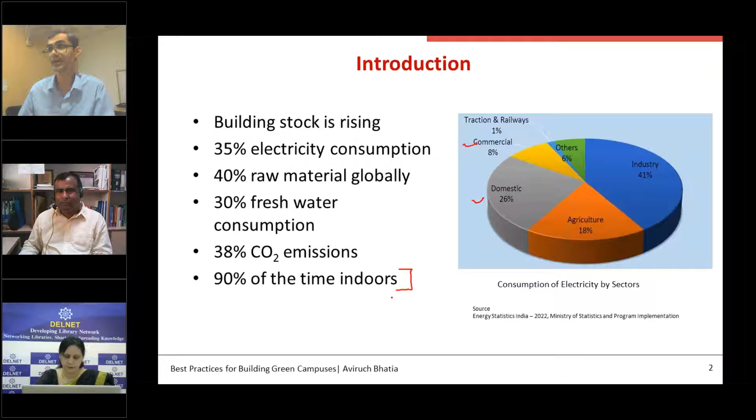Buildings also consume 40% of raw material globally. There is fresh water consumption, CO2 emissions, and 90% of the time we spend indoors, so that should be comfortable also.

To reduce this resource consumption, India is committed at COP26 2021, and as per India's commitment, 50% of our energy needs will be through renewable sources by 2030. We also need to achieve net zero carbon emissions by 2070.

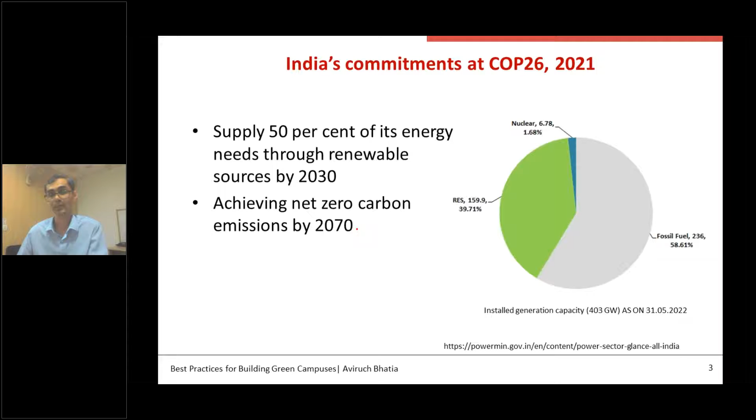To achieve this, we need to construct green buildings and adopt green building features. How do we define a green building? A green building is a building that in its design, construction, or operation reduces or eliminates negative impacts and can create positive impacts on our climate and natural environment. It preserves precious natural resources and improves life quality. So green building is not only for saving energy, water, or material, but also to bring healthy living conditions inside our building.

Campus buildings are also important because students study in this campus. So these green buildings, if we are making them, have both tangible and intangible benefits. Tangible benefits are water use reduction and energy use reduction, but intangible benefits include health and well-being of students, faculty, and other staff.

It includes enhanced air quality, excellent daylight, and other conditions. Generally, a green building has 5 major areas that include energy, indoor air quality, materials, site, and water, and it will give us healthy, comfortable, durable, energy efficient, environmentally responsible conditions.

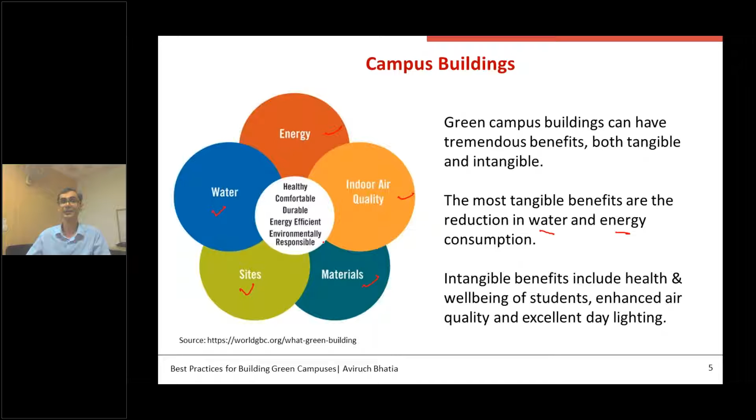So let us start with energy efficiency. These energy efficiency features in building we can achieve with passive design, because nowadays, as outdoor temperature is rising, we are using a lot of air conditioning systems, that is HVAC - heating, ventilation, and air conditioning. Passive and low energy design systems can minimize the hours where we actively use air conditioning systems.

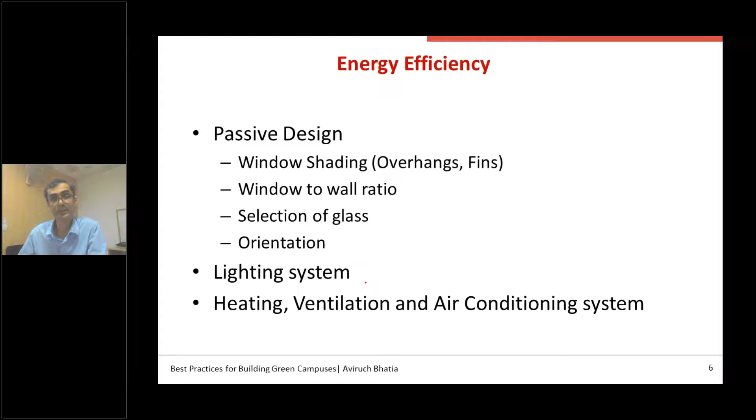Passive design features that we can adopt are window shading, including overhang, fins, blinds, window to wall ratio, selection of glass, and orientation. There are other methods like earth air tunnel, stack effect, chimney that can be adopted, and lighting system related measures can be adopted in buildings, and various HVAC system related measures are also there.

Let us start with windows in passive features. Generally we use single glass window in our building, but if we replace that single glazed glass with efficient high performance single glazed glass, or make it double or triple glazed glass - in double glazed glass we can fill either air or inert gases.

The replacement of glass with a high performance glass can lead to a lot of savings, because the glass has three main properties that we call visible light transmittance, solar heat gain coefficient, and thermal transmittance of that glass.

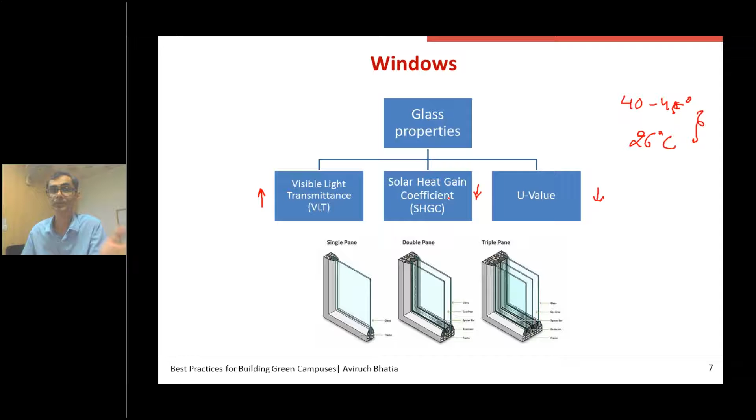India is in tropical climate, and we always want to restrict heat transfer, because in India we have outdoor temperature at 40 to 45 degrees Celsius, and inside we maintain, let's say, 26 degrees Celsius. So there is a delta T, and whenever there is a delta T, there is heat transfer, and we don't want heat to come in because it will lead to hot, warm conditions inside and increased use of air conditioning system. So we need to restrict U value to be lower, and solar heat gain coefficient - the direct sun radiation we are getting - we want it to be lower, and visible light transmittance we want as high as possible, because the main purpose of windows is to bring useful daylight for us. So in Indian conditions, U value and SHGC should be lower, and visible light transmittance of window should be higher.

Here is the total spectrum of solar radiation that we receive. We are interested in this visible portion - there is ultraviolet, visible, and infrared. This visible portion of the spectrum is useful for us because it can be used for daily visual activities, but infrared and ultraviolet cause heat, and our aim should be to reduce these portions. So a high performance glass is available to minimize the infrared part and maximize the visible part.

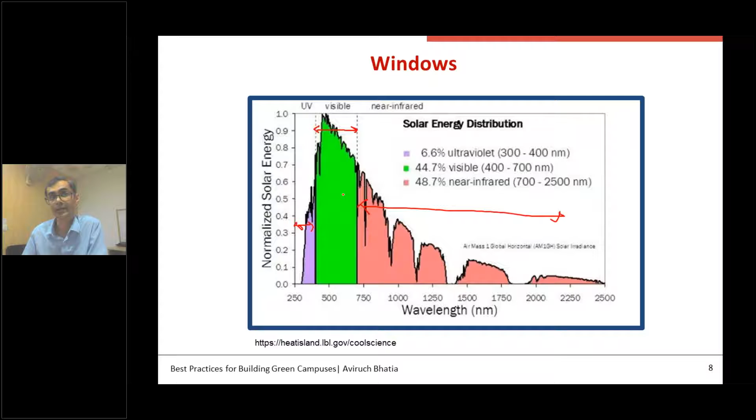Window to wall ratio is also important. In the Western world, where climate is cold, they use large windows in their buildings, but copying that same architecture or window to wall ratio in India is not recommended, because we have a different warm climate and we want to reduce heat gains. In the Western world, in cold climate, they want to increase heat gains because there is heating energy consumption, but here we have cooling energy consumption, so we want to reduce it. So window to wall ratio is, let's say, this is your wall - total wall area - and this is window we have, so this is window area to wall area.

In Indian conditions, even the energy conservation building code has a cap of about 40% window to wall ratio. So we can use different simulation tools to find out what is the optimum percentage of windows we can provide in our building. You can see this chart.

How does this chart vary? If there are no windows in our building, it will be completely dark and we'll use interior lights. But if we have windows, we get some daylight inside, and our use of interior lights is limited, so energy consumption comes down. But after a certain percentage, all our interior lights are switched off, and if we keep increasing window to wall ratio, energy consumption rises again, because the heat gains from windows increase the energy consumption of the air conditioning system.

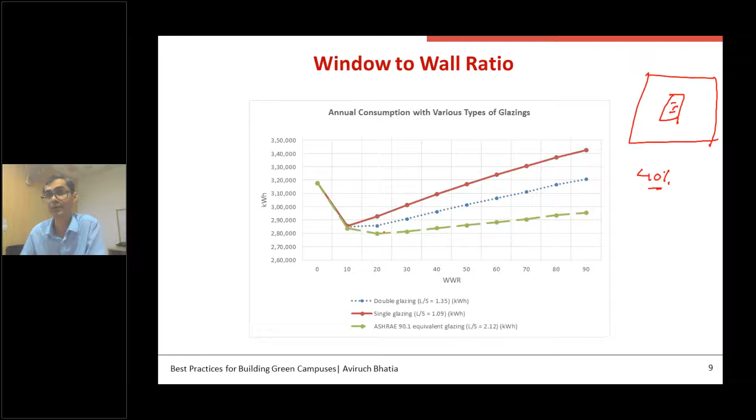With different types of glass, if you use single glaze glass, the inversion point is lower. If you use better glass, like double glaze glass, or ASHRAE 90.1 equivalent glass, we can get this inversion at a higher point. So instead of having fully glazed walls, if we limit our window area, or optimize it, it will really help bring in more daylight and save energy.

We can also reduce energy consumption for the lighting system by having efficient lighting fixtures, efficient LED lights, daylight controls, and occupancy controls.

Daylight controls help us whenever daylight is available. It will automatically switch off interior lights, or it can dim and adjust them. That will lead to savings in energy consumption.

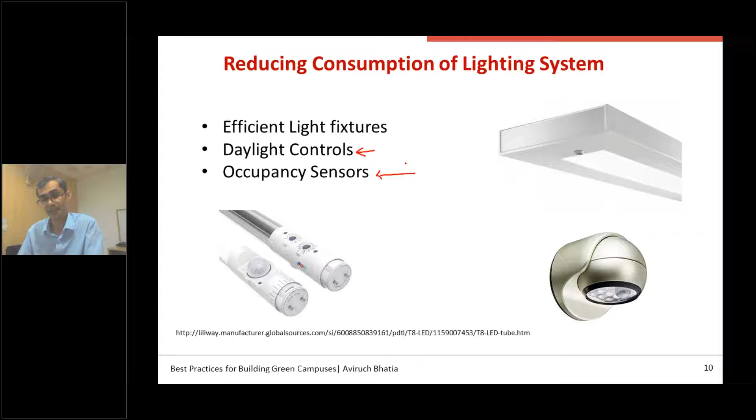Occupancy sensors let us switch off some portion of the interior lights when there are no occupants. This is how we can save energy. Green features like installing daylight controls, occupancy sensors, and reducing lighting power density can help us save a lot of energy.

Here is an article published by researchers who demonstrated this in a university building. If we install a motion detection system and room management system, about 30% of energy can be saved.

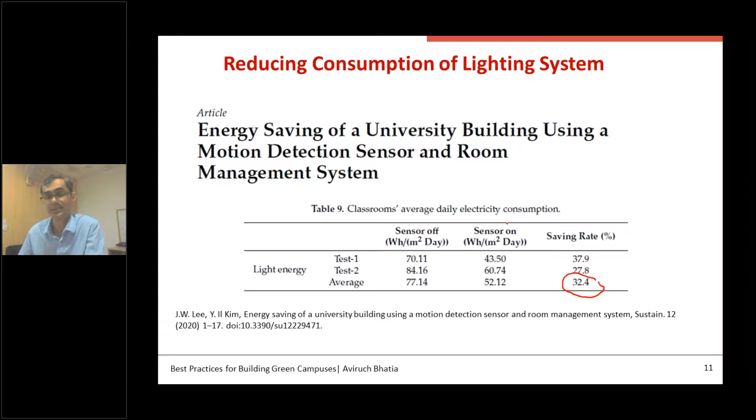Classroom daily electricity consumption. Now we'll come to equipment and appliances. The best practice is switching off, or enabling power-down mode, which reduces energy consumption and heat produced by equipment, which in turn lowers the cooling costs. Whenever equipment is not being used, we can switch it off.

Upgrading existing equipment: some energy efficient appliances may cost more to buy, but it will recoup savings over the lifetime of the equipment. Like we now have the BEE star rating system, so if we use star-rated fridges, fans, and equipment, the initial cost might be slightly higher, but over the long run in operating conditions we can save energy.

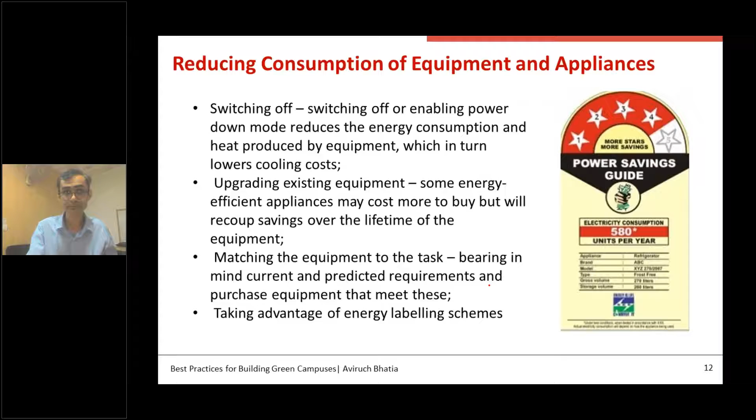Matching the equipment to the task, bearing in mind current and predicted requirements, and taking advantage of labeling schemes that are available. Whenever appliances are not used, it is better to switch them off. For example, with computers, generally we won't shut them down, we just hibernate them and keep them like that.

If a computer is left on overnight for a year, it creates enough CO2 to fill a double-decker bus. This is ghost power, because we are not switching it off. Even in hibernation mode, a computer system consumes some power.

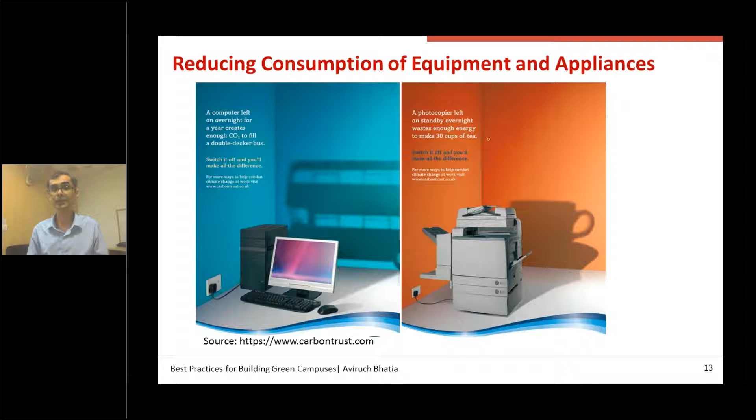We also use photocopier machines in our campuses. A photocopier left on standby overnight wastes enough energy to make 30 cups of tea. So it's recommended that whenever appliances are not in use, it's better to switch them off instead of keeping them on standby.

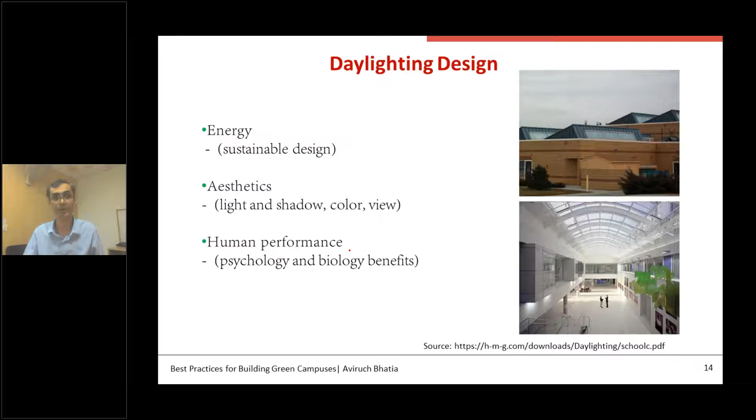Daylight design is also a green feature, because for visual tasks we need daylight, and daylight can help save energy - if we get sufficient daylight in our building, we can switch off our interior lights and save energy not only on lighting but also on the air conditioning system. It can help increase aesthetics, and also increase human performance with psychological and biological benefits. This is one such study done in the USA.

This study was done for the daylight classroom and without daylight classroom. 21,000 students' test scores were analyzed. It was found that if we have good daylight in our classroom, students perform better, 20% faster in a math test and 26% faster in a reading test. So there are a lot of benefits.

If we work in a without-window environment, versus an environment where we have sufficient daylight, our performance is generally increased because daylight gives psychological and biological benefits. And also the views are important. If we are able to see the outdoor conditions, if we are connected to outdoor, this will give additional benefit.

Thermal comfort is also one of the features in green buildings, and thermal comfort generally depends on 6 parameters: air temperature, mean radiant temperature, relative humidity, air movement, clothing ensemble, and metabolic rate and activity.

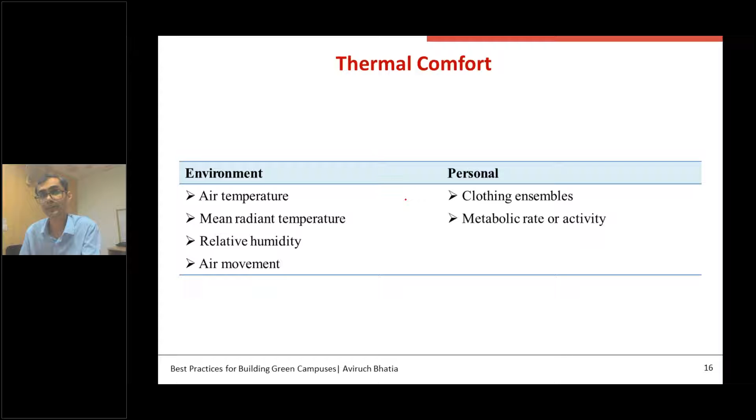Why is thermal comfort important in green buildings? Because if we are thermally comfortable, our productivity for work increases, and also it is related to energy, because of the set point we generally maintain for the air conditioning system. Generally we maintain about 23-24 degrees Celsius in air conditioned spaces, and if we increase the set point by just 1 degree Celsius, we can save about 4 to 5% cooling energy.

So how do we decide what set point we should maintain? Instead of 24 degrees Celsius, if we set our set point to 26 or 27 degrees Celsius, whether it is giving comfortable conditions to us or not - the 6 parameters that we discussed about thermal comfort play a role.

We can set temperature higher with the use of a ceiling fan, because air movement is also one of the parameters. So instead of switching off the fan, run the fan at a lower speed and increase the set point. It will give us the same comfort conditions.

These comfort conditions are also dependent on mean monthly outdoor temperature. In New Delhi, the mean monthly outdoor temperature is about 33-34 degrees Celsius, so our comfort conditions are at the highest set points, compared to someone living in Stockholm, where mean monthly outdoor conditions are at 16 degrees Celsius. So we can feel comfortable at about 31 degrees Celsius also.

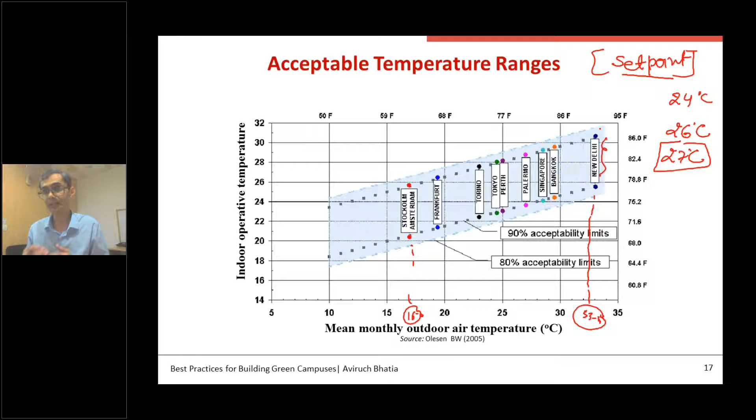It is not like we need to set our set point at 22 degrees Celsius and cool that room too much. We can increase the set point while slightly increasing air movement by switching on a fan. By doing this, we can save a lot of energy.

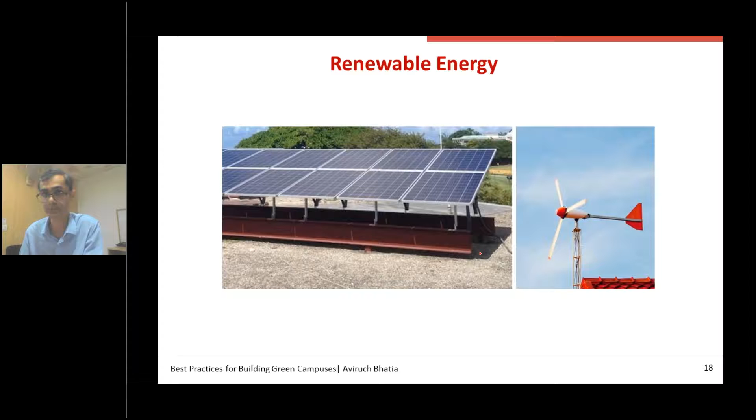Whatever measures we can put in our buildings - first is to bring measures by which you can decrease energy consumption, and for the rest of the energy that you are not able to save, we can install renewable energy generation systems like photovoltaic or small wind turbines to generate green energy, because the energy we get from the grid is mostly from thermal power plants where coal is consumed, causing CO2 and GHG emissions. If we install photovoltaic and wind energy systems, these are clean sources of energy, and we can generate it on site, or invest in it off site.

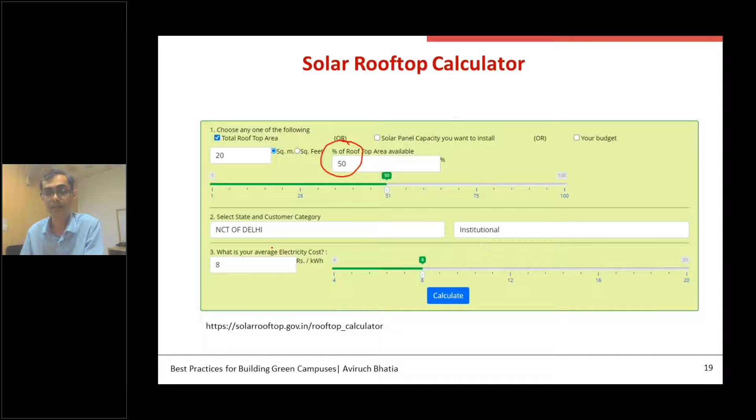Here is a calculator from the government available to size the system - how much roof area is available for installing, and we can set here if it's an institute, if it's in Delhi, what is the electricity cost, how much roof area is available. In this example I've kept 20 square meters of area available, it's an institute type of building, and this is the electricity rate we are paying.

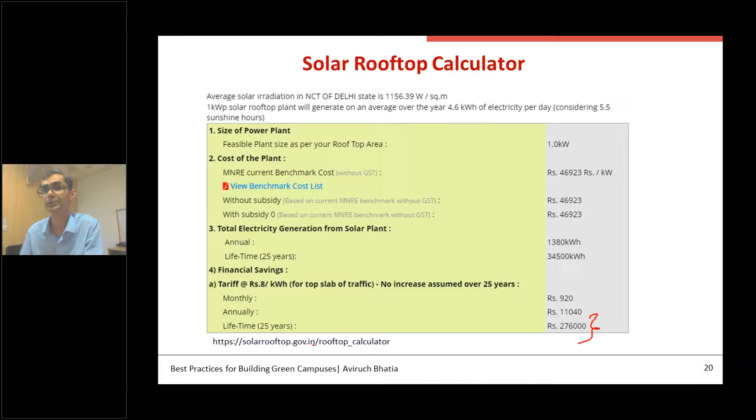By filling this information, it will also suggest how much photovoltaic power plant you can install, what will be the cost per kilowatt, what will be the energy generation, and what your lifetime cost savings will be. So you can visit solarrooftop.gov.in to find out how much PV you can install on your rooftop.

This is one more green feature we can adopt: the cool and green roof. It requires minimum investment - just paint our roofs with white color paint, or a green roof can also be installed. So what is the benefit of installing a cool roof?

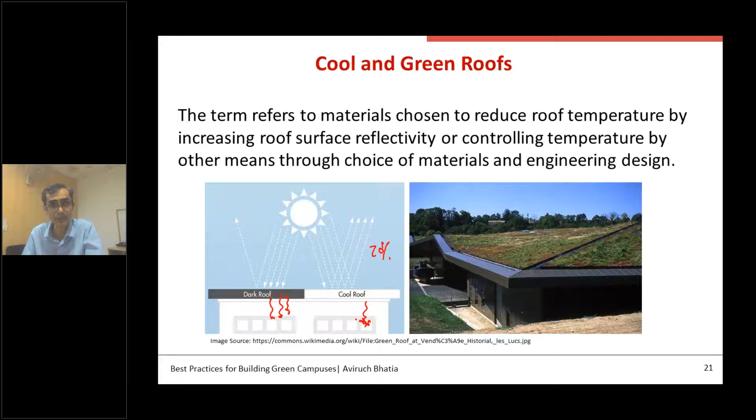So this roof is absorbing only 30% of heat, and only few heat gains are in the building. So you can reduce your air conditioning energy and bring thermal comfort conditions inside if it is a comfortable passive condition. So cool roof and green roof are beneficial, not only in getting green points but also in saving energy.

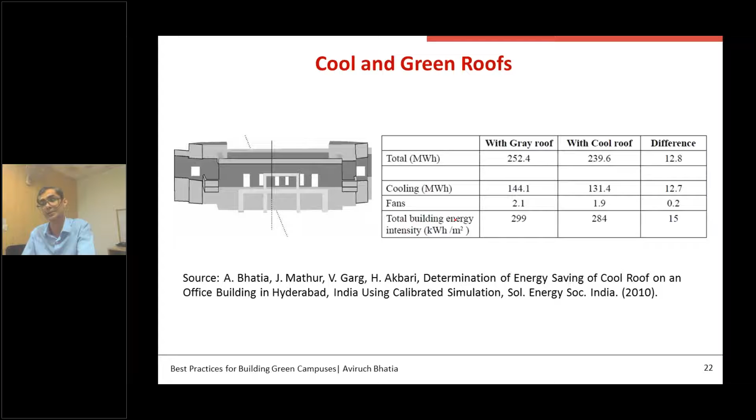And at the urban level, the urban heat island is a problem. Urban heat island is when the regular temperature is there, but at the city centers there is a higher temperature than the surroundings, and that we call the urban heat island.

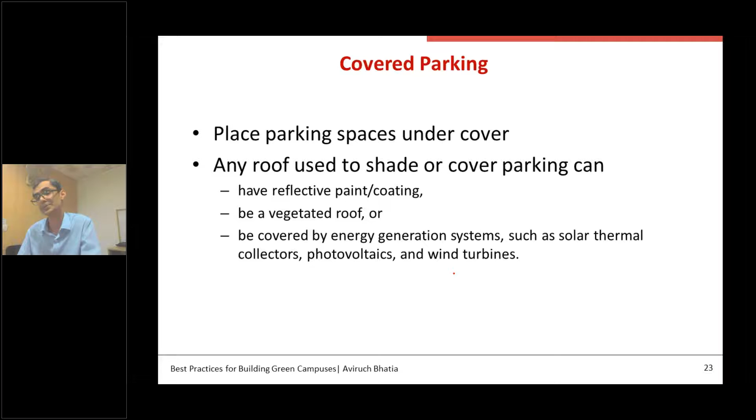To reduce urban heat island, one way is because parking spaces are black or tar road, and vehicles parked outside absorb a lot of energy and heat. So if we can move parking to covered spaces, and these covers can have reflective paint, vegetated roof, or energy generation systems, it can help reduce urban heat island effect.

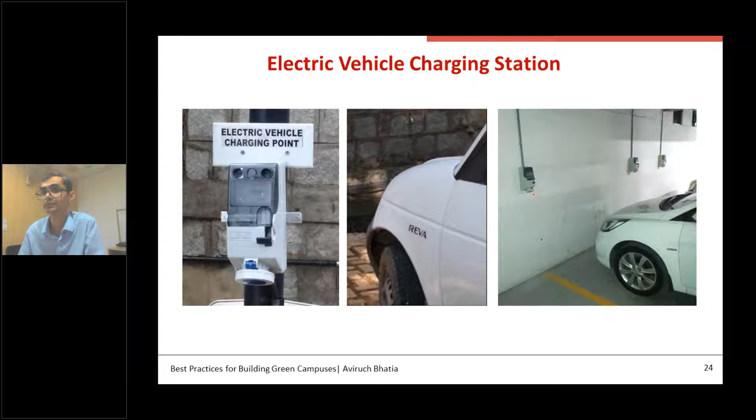Also regarding parking, if we can install electric vehicle charging stations - nowadays electric vehicles are there, so you can see electric charging point stations if the car is there. If we give preference to those bringing electric vehicles by providing charging stations so they can charge their vehicles, it can help.

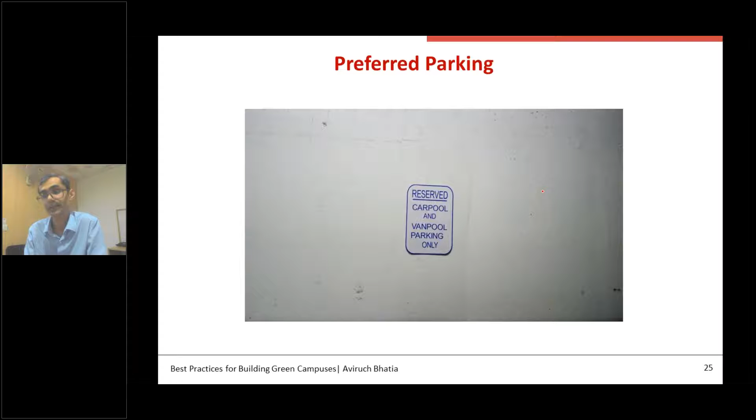And also keeping reserved parking for carpool, because if we are doing carpooling and van pooling, that can add value, because we are reducing the number of vehicles on road, which leads to reduced CO2 emissions and pollution. So giving reserved or preference parking for those coming by carpool or van pool can add to the green feature.

Night pollution reduction is also a site related parameter. We have different nocturnal birds, and if there is light pollution at night, it is harmful for them. So consider the location and surrounding areas during lighting design, select luminaires, location, and orientation that minimize light trespass into adjacent properties.

Aim the light angle low so the entire beam falls within the intended area and is downward. Use well shielded luminaires, couple outdoor lighting with lighting controls and motion sensors, and design interior lights such that they won't go out of the building. That can help reduce night pollution.

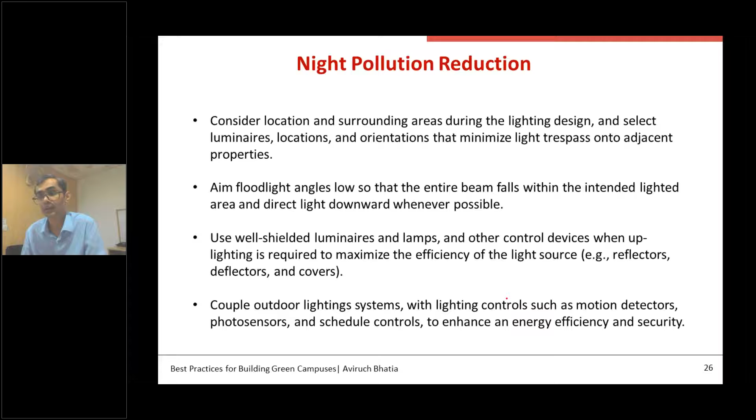Now we come to water related efficiency, because if our buildings are green, we can save a lot on water, including potable fresh water. By use of water efficient plumbing fixtures, ultra low flow toilets, urinals, waterless urinals, energy efficient low flow sinks, and water efficient dishwashers can help. Also water recycling or reuse.

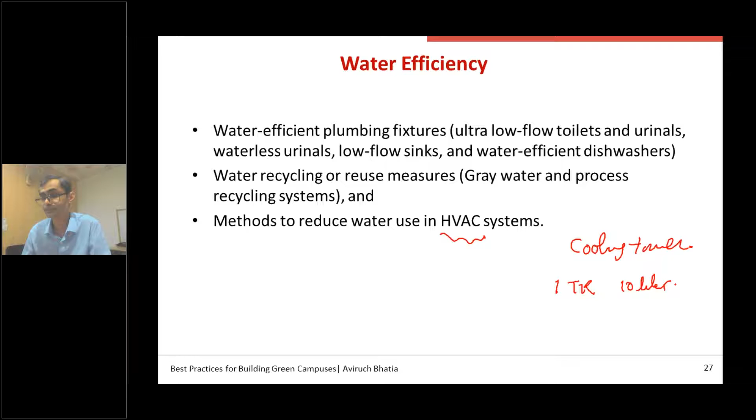Methods to reduce water use in air conditioning systems. In air conditioning we use a lot of water, because in central air conditioning systems we use a cooling tower, and this cooling tower, per ton of cooling per hour, consumes about 10 liters of water. So a huge quantity of water is required.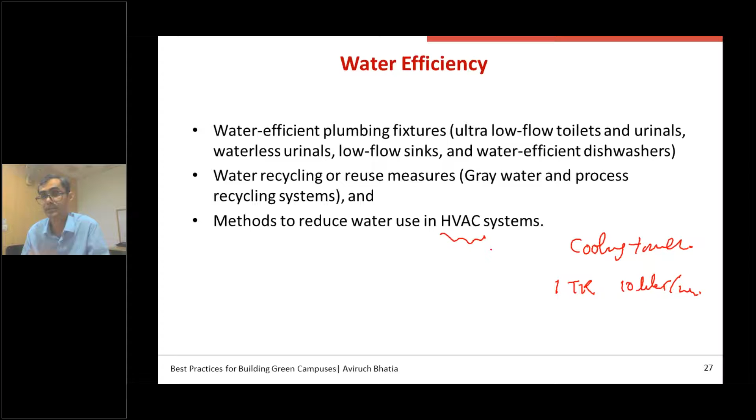So if we are using gray or recycled treated water for the air conditioning system, that can help reduce freshwater requirements.

In landscape features, irrigation and landscape measures include water efficient irrigation systems and irrigation control systems. You can see drip irrigation - if you can provide that, reduce the turf area since turf needs a lot of water, prefer native species, and use xeriscaping with species that take very little or zero water, that can help save water for landscape.

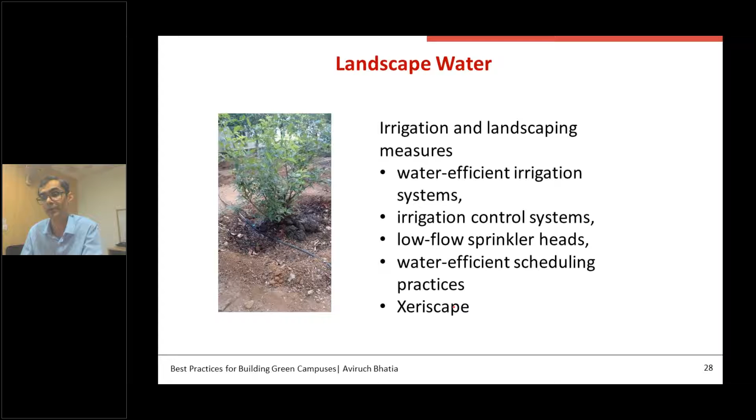And creating a water balance can also help to understand where water is going. This is the sample water balance for one of the projects I have done. You can see here this is supply water from the municipality, and this water goes mainly for domestic and flushing purposes.

Both water in this project we are collecting, and it is going to the sewage treatment plant, and we are getting this recycled water, which we again use for flushing. So in this project we have dual flushing lines - some portion, about 8.4 KLD, comes from fresh water, but the remaining recycled water we use for flush.

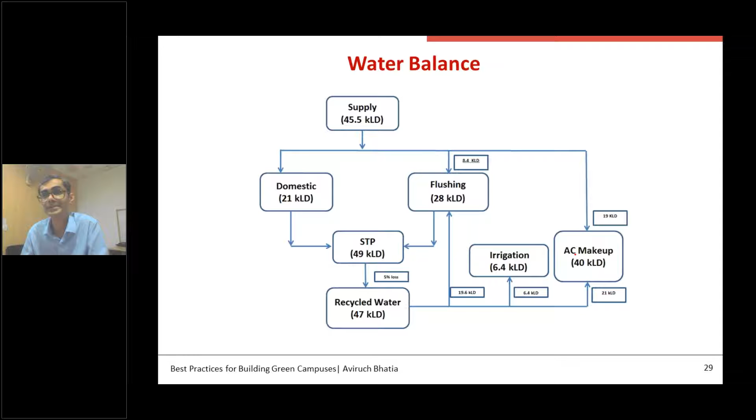And irrigation water, 6.4 KLD, and AC makeup water. So by creating this type of water balance, we can understand if there is any loss of water or how much water we are using for different purposes. And rainwater harvesting, both roof and non-roof, can be one of the measures.

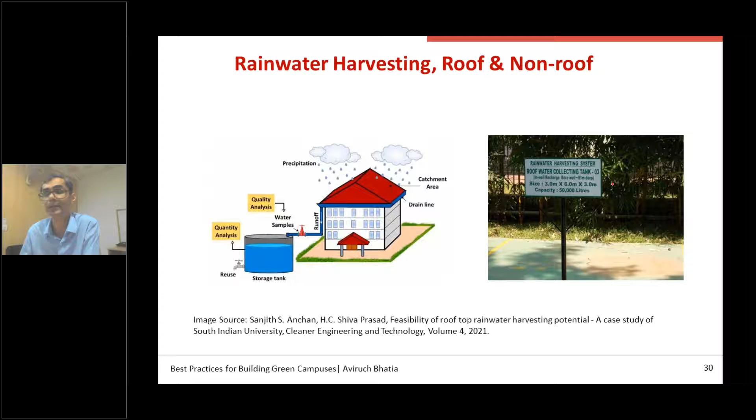On the roof area we can install pipelines to collect rainwater, filter it, and then store it in a storage tank, or use it for recharge of the aquifers. In one of the projects, the roof water collecting tank has a 50,000 liter capacity, and it is connected with the aquifer for groundwater recharge.

After water, there are some features related to materials. Segregation of waste is one of the green features. Whatever waste is generated in our building, if we are able to segregate it, like in campus we have paper - after taking printouts, if one side is available for use, we can use it for some other purpose, saving on paper.

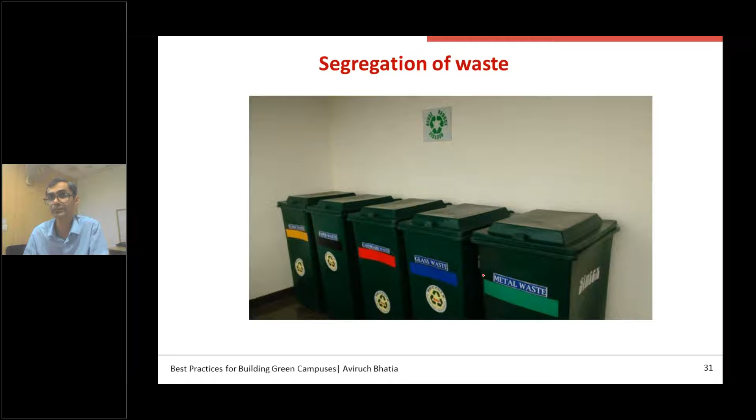We need whatever cardboards and other things, if we can recycle them - dry waste, wet waste, or metal waste - if we can separate them out and use them wherever possible, reduce and reuse, this can be done. In schools, because students are indoor, a dust-free environment is important, as that is related to indoor air quality or indoor environment quality.

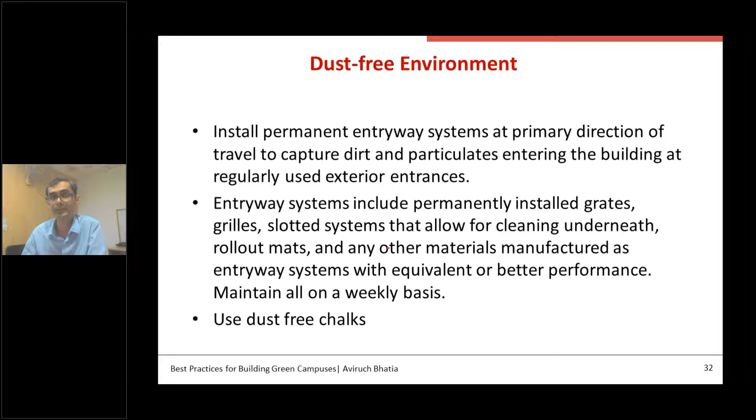We can install a permanent entryway system at the primary direction of travel to capture dirt and particulate entering the building at regularly used exterior entrances. Wherever there is an entry system, if we can install some kind of dirt capturing system like grates, grills or slotted systems, and regularly clean them.

We can also use dust-free chalks to increase air quality. One more green building feature is fresh air, because especially in schools and campuses, in classrooms occupancy density is quite high. If there is a 2-hour class with students continuously sitting, CO2 levels will rise, and a rise in CO2 level leads to drowsiness, eye irritation, and inability to concentrate - these are all adverse impacts of CO2 levels.

So what we need to do is have fresh air intake. We can supply fresh air through our air conditioning system, or we can also have operable windows, so we can allow some fresh air to come in to keep a check on CO2 levels. These type of CO2 sensors are available.

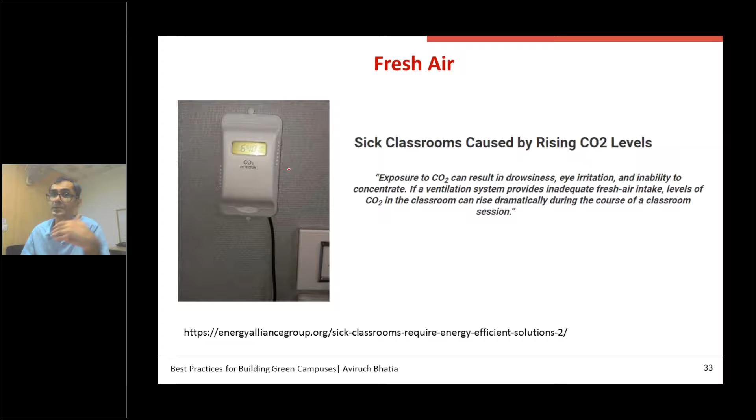If we can install these type of CO2 sensors in classrooms or highly occupied areas, meeting rooms, conference rooms, we can see if CO2 levels are going high, and then we need to open windows or start a fresh air, dedicated fresh air system.

And volatile organic compounds - VOCs are carbon containing substances that easily become vaporous or gases. They can be found in paint, coatings and cleaning products. In coatings, solvents containing VOC assist in quality of application and drying, so the paint substance does stick on the surface.

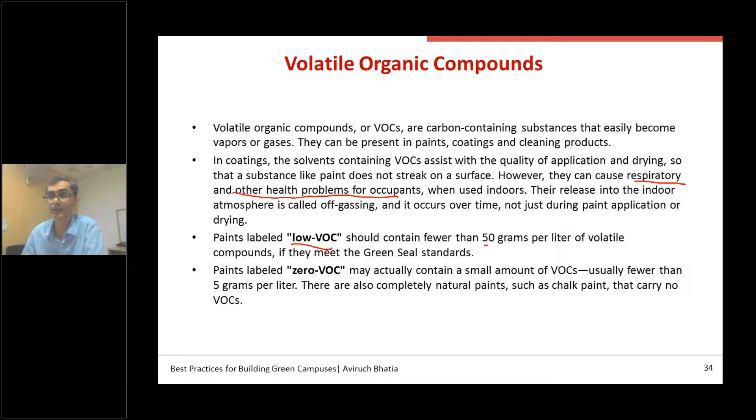These can cause respiratory and other health problems for occupants. When used indoors, they release into the indoor atmosphere through off-gassing, which occurs over time. So we can use paint that is low VOC - less than 50 grams per liter - or zero VOC natural paints.

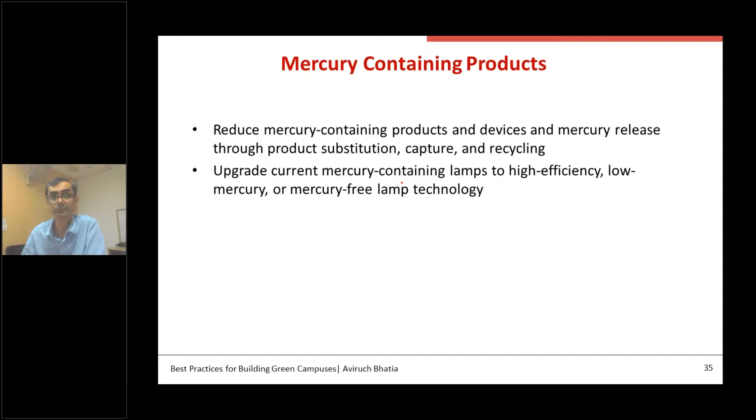We can also use products having lower mercury, reduced mercury content - basically mercury-free lamps we can use.

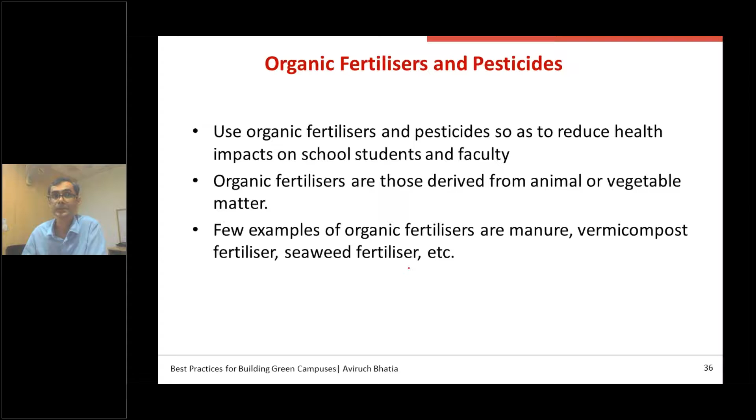We can use organic fertilizers and pesticides to reduce the health impact on school students and faculty. Organic fertilizers are those derived from animal or vegetable matter. A few examples of it can be manure, vermicompost, seaweed fertilizer, etc.

Green housekeeping - use environmentally friendly cleaning products to prevent chemical related health hazards. Housekeeping products include hand wash, soap, detergent, and toilet cleaning solutions.

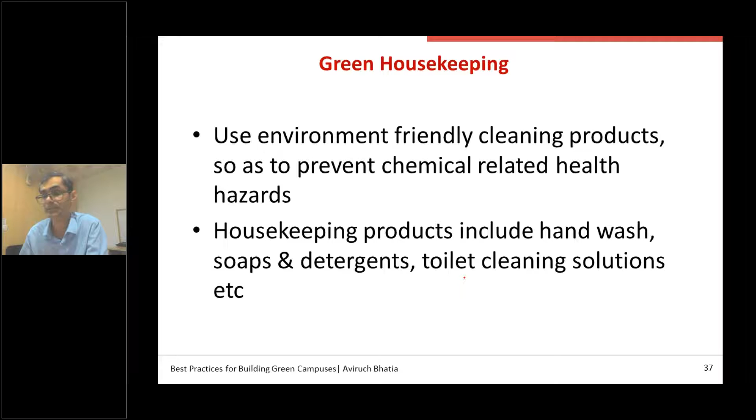Also, because of use of air conditioning systems and fire suppression systems, we generally use HCFC and HFC refrigerants - these are ozone depleting substances. So we need to minimize or use refrigerants such that they have minimum ozone depletion potential, ODP.

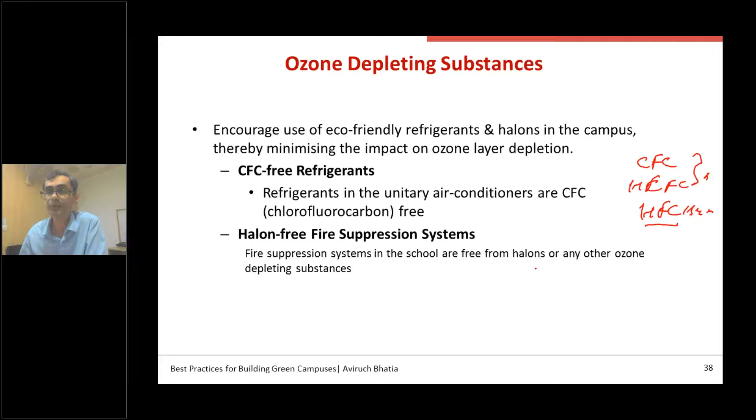So we have CFC, HCFC - these we need to omit. HFCs 134A, 410, and nowadays in future refrigerants are also available where we are minimizing these. Also, the fire suppression system should be free of halons or any ozone depleting substances.

Now we have discussed green features related to energy, site, water, indoor air quality, and materials. Now this is the case study I am going to take. This is the TERI School of Advanced Studies in our campus. What are the green features that we have installed?

Our campus is located in Vasant Kunj, New Delhi, and it is 2 acres of campus. Sustainability is the key concept guiding the entire design. We have this G+4 building with institutional area, commercial space, and student hostels.

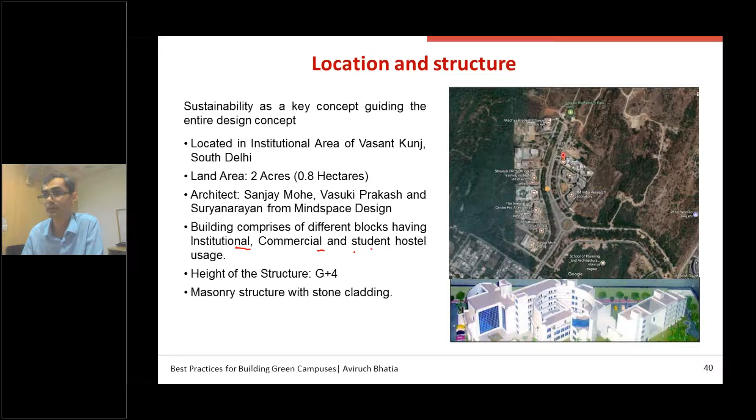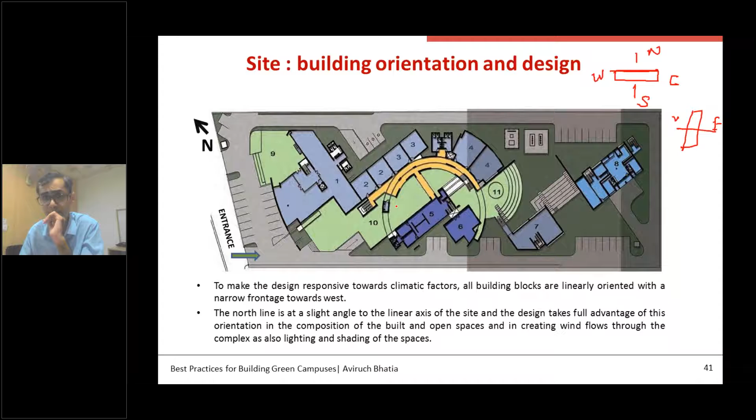Building orientation and design: the building is oriented in such a way to minimize direct solar exposure. If our building is oriented minimizing towards east and west, with more area towards north and south, this orientation is generally considered the best. If the building is oriented so more area faces east and west, we get more direct radiation. So this building was designed to get the benefit of sun angles to reduce direct exposure to sun, and wherever there is sun, for the daylight feature we need to provide windows.

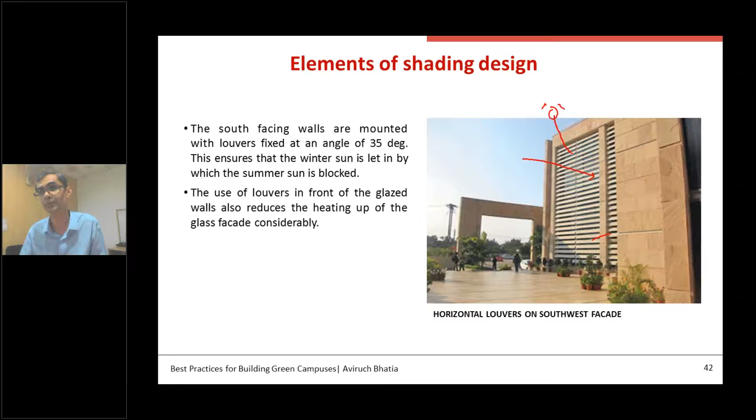Windows are provided such that they are perfectly shaded, and this shading does not block our views to outside. This south facing wall is exposed, and its louvers are mounted at a 35-degree angle. This ensures that winter sun is let in, so in winter we get direct sun inside, but in summer, since the sun angle is higher, it is blocked by these louvers.

And buffer spaces: all classrooms are provided with buffer spaces so there is no direct solar exposure to rooms. You can see the corridors are provided, and these corridors help to cut direct exposure of solar radiation.

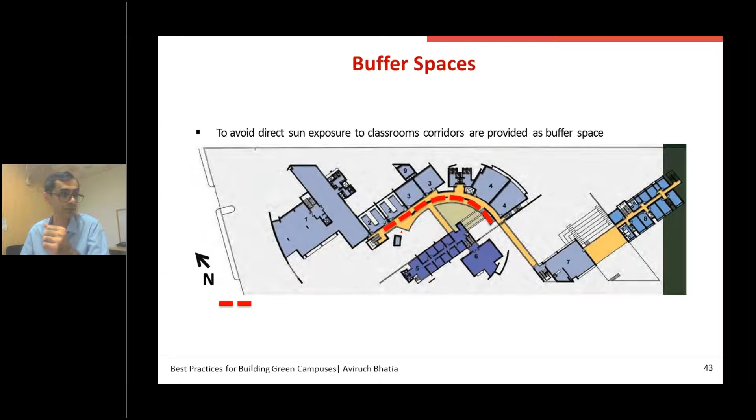Daylight design: all spaces are designed such that they get sufficient daylight. The combined daylighting system and interior lighting system is designed to reduce 70% of lighting energy demand, and the use of efficient windows helps reduce heat gain in summer and heat loss in winter without compromising daylight integration.

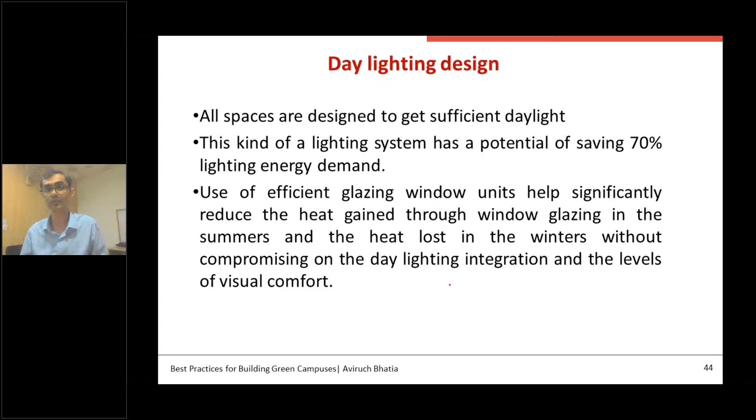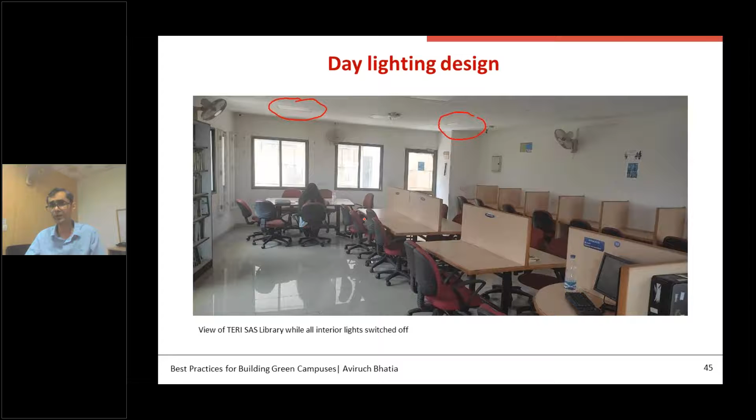You can see this view of the library where all lights are switched off. These are the interior lights and they are not on. Windows are designed such that we get sufficient light inside the building, so occupants can read easily at whatever illumination level is required by the National Building Code of India. We get sufficient light without turning on interior lights, saving not only on the air conditioning system but also giving direct benefit on the thermal comfort of the spaces.

We also have a very efficient air conditioning system, the variable refrigerant volume system with a high COP, and natural cooling systems. We call it earth air tunnel technology, where we use the ground as a heat rejection system and for thermal mass storage. Using this earth air tunnel technology, we are able to save 50% of the energy required for air conditioning compared to a conventional system, and thermal mass gives us 40% energy saving.

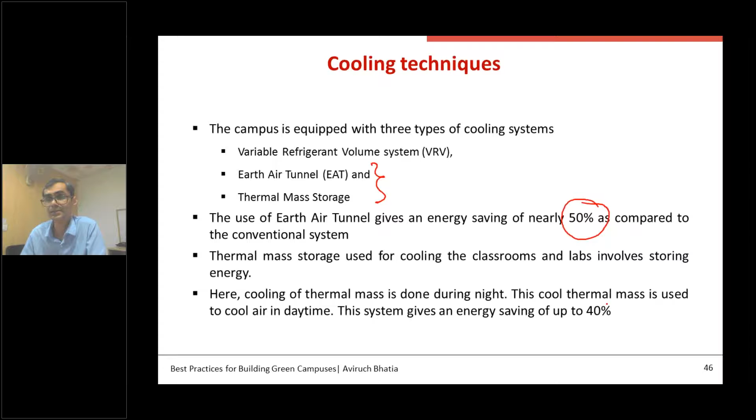How does this earth air tunnel system work? Generally at 3 meters below ground level, we have an almost constant temperature. So if outdoor conditions are at 45 degrees Celsius, we can have about 20 to 25 degrees Celsius ground temperature, because the ground acts as an infinite heat sink.

So in the system, we take fresh air from outside at 45 degrees Celsius and pass it through pipes in the earth. This 45 degree air comes out at about 20 degrees Celsius. Then we have a chiller plant; if we are not able to get comfort conditions, we use this chiller plant, otherwise this air is directly supplied to our hostel rooms.

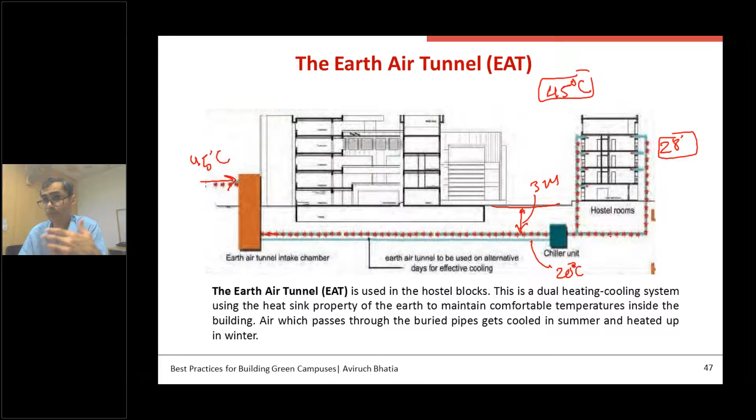So even in summer conditions, when it's quite hot outdoors, we find our hostels are comfortable. We cannot say it is maintained at 24-25 degrees Celsius, but we are able to attain 28 to 30 degrees Celsius with this earth air tunnel, bringing temperature down with zero air conditioning refrigerants.

We also have a solar rooftop system: 48 kilowatts of solar PV installed, and 5 kilowatts separately for R&D purposes.

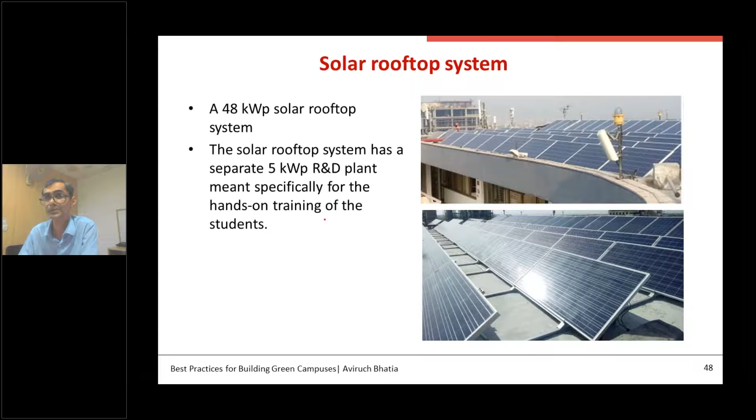PV is installed. We also have one small wind turbine installed at our campus.

For water management, to reduce water demand, buildings in the campus have been provided with low flow fixtures and dual flush toilet lines. Low flow taps result in 25% saving in water use. Whatever wastewater is generated in hostel buildings, we treat with a sewage treatment plant, and rainwater runoff from the roof and site is used for recharging aquifers.

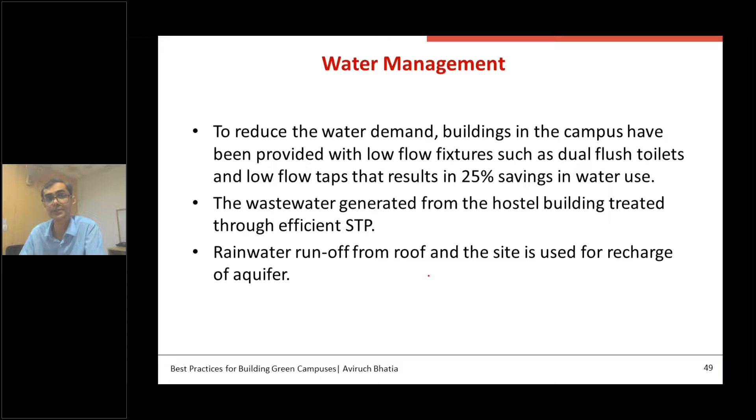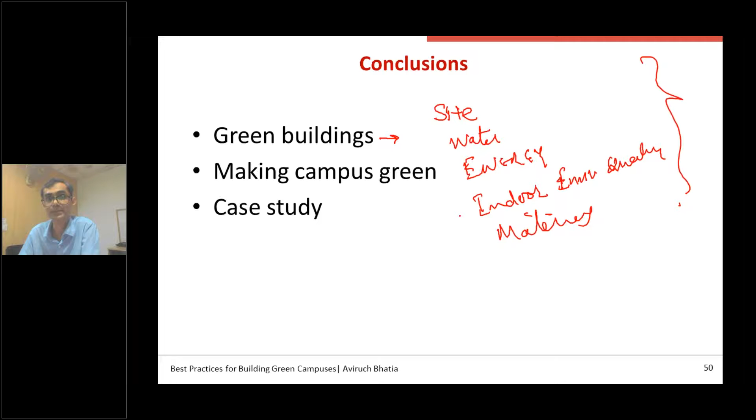So in conclusion, we discussed different green building features that can be adopted in a campus. These features relate to site, water, energy, indoor environmental quality, and materials. These are the main green building features we can adopt to make a green campus. We also discussed the case study of TERI School of Advanced Studies and its green features.

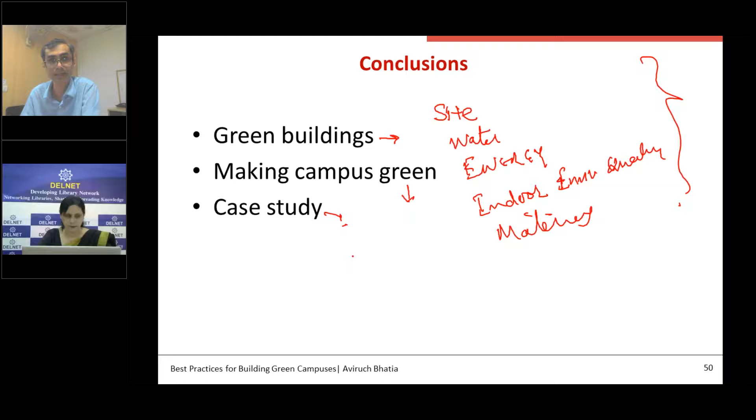Thank you very much. If you have any questions, we can discuss them.

Thank you very much, Dr. Bhatia, for delivering such a highly exhaustive session on best practices for building green campuses. We are greatly impressed by the way you carried out the entire deliberation in such an easy way—complex things made to sound achievable. You have really inspired each one of us to become green professionals, to make our environments greener and greener.

That speaks volumes of your commitment and of the contributions you have been making in this field. You have touched upon so much, and I think for each one of us, wherever we are working in our institutions, there are a large number of takeaways.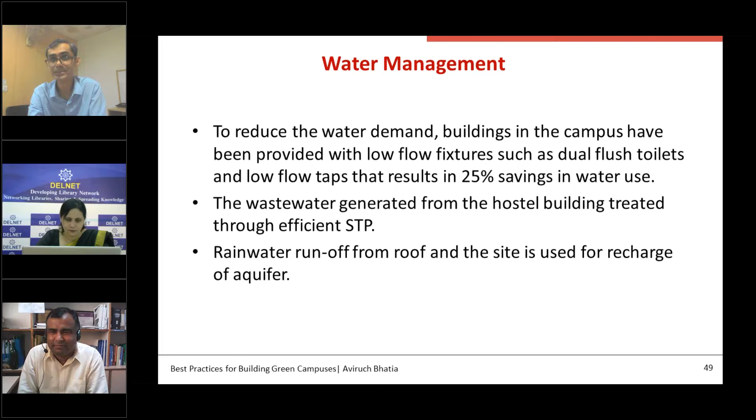I would like to take a question, Dr. Bhatia, coming in from one of our attendees. The first question is: how to calculate institutions', buildings' water auditing? This is from Sheikh Mira, who wants to know how to calculate institution and building water auditing, and whether there are any procedures in place for it, including for hostel buildings. Dr. Bhatia, you may be the best person to answer. For water auditing, we need to install water meters, and it's best to create a water flow chart.

I have displayed in this slide the kind of water balance we can create. Based on the water meters, since we know the supply we are getting from municipalities, we can track how much is going where—for example, to the flushing tank, or for domestic purposes. Accordingly, based on the waste we are getting, a sewage treatment plant of appropriate size can be installed, and we track again where this treated water is going. This is what we call the water audit. For that, we need to install different water meters and keep check on what quantity of water is flowing.

Thank you very much, Dr. Bhatia. Yet another question, this one from Mrs. Smita Bhatia, who wants to know about using thermocol sheets as insulation on roofs or as part of false ceilings.

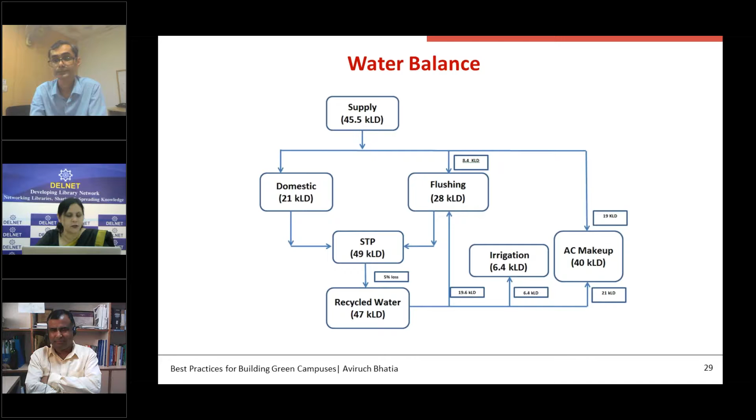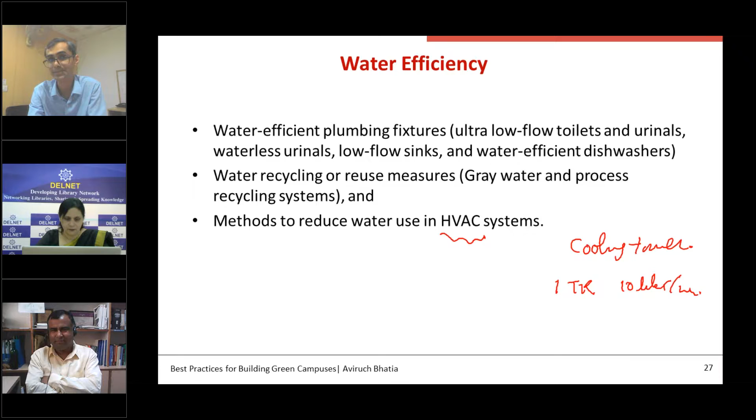Yeah, this is a very good measure. I didn't show it in this slide because it's generally used while constructing, and I try to keep the measures that we can adopt easily. Using insulation materials is a very good measure for reducing energy consumption in buildings. Instead of brick or normal concrete roof, if we can have some kind of insulation, that can also be a very good strategy.

Insulation materials are not only thermocol - polyurethane foam is available, PIR polyisocyanurate is available, and glass wool materials are also available. It's always beneficial to install insulation on the roof side, like over the deck, because the roof gets heated - installing over roof is more beneficial. But if there's a problem due to rain, we can also install it under the roof and cover with false ceiling and gypsum board. That's a very good feature and really helpful. The combination of cool roof, green roof plus insulation can reduce heat gains of our building.